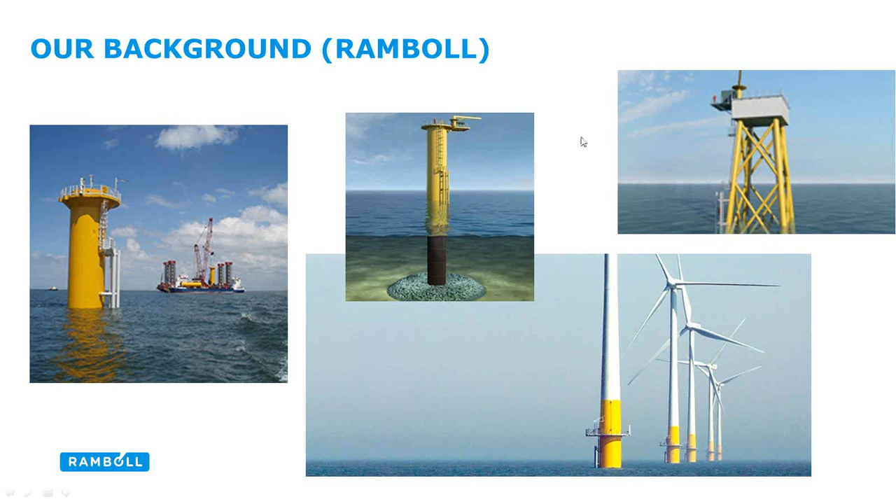Okay, so what we're going to talk about: I'll give you a quick overview of our project, both the design aspect and the actual build aspect, and then how we've arrived at the design we've got - the different concepts we've looked at and developed, and what we've learned from other research and development projects we've been aware of, and then how we arrived at our current design. There's little bits about it too, like the foundations we're considering, how we're going to fix the turbine, how we plan on installing it, different types of connections for example, and then the next steps of the design we're working on at the moment - the frequency analysis - and what the next stages are, and then a brief section about the water pump, the use of the final installed tower and turbine. And throughout, any input would be great.

I realize you're all muted, so maybe just make a note of any useful tips or hints that we could take into our design, so we don't make the same mistakes, and then we'll go through it at the end. I'm sure we'll have a good discussion at the end, so I look forward to that. So, a project overview.

Firstly, why a wooden tower? I'm sure everyone has more experience in this than me, but the reason we've gone for a wooden tower is partly due to potential cost savings. Apparently in previous projects, sourcing the metal tubing which makes up the vast majority of the tower is quite expensive, and you might not be able to actually source it in the location where you are. If there's only one supplier of such metal tubing, it could be very expensive and potentially put pay to your project. If you had a turbine already made and all you wanted was a tower, it avoids the need for welding kit, which could work out really well if you don't have any available at the time.

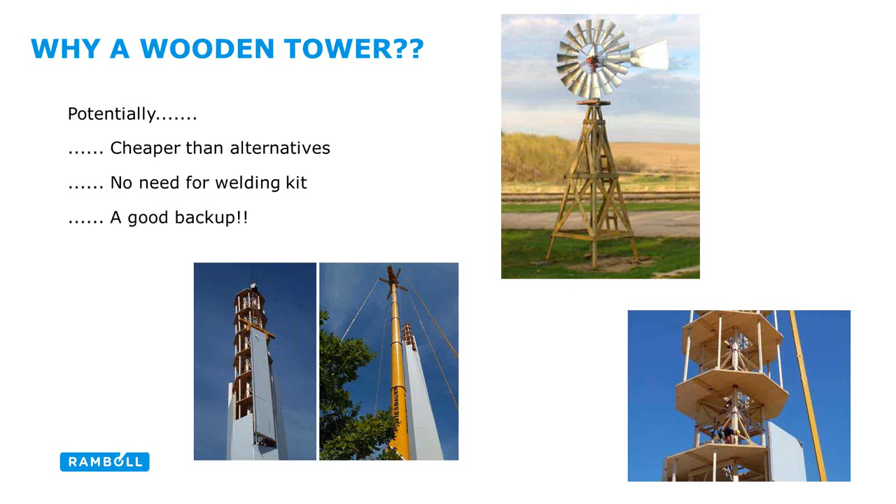So who's been involved in this project so far? Quite a few people. It started with Pete, who's on the call. He set up the charity I Love Wind Power and has been involved in several projects through them. He approached one of the guys from my company and asked whether he would want to be involved in this project. He then wasn't able to, unfortunately, so passed it on to me and Finn in the corner there.

And then we worked on it for a bit. Finn left the company, other people have been involved - so Tom, Kerr and Mark, also from Ramboll. Marco got involved - he has already completed the project in Brazil and has loads of useful insight into that, and is going to come out with us to eventually complete the project, which would be great. Tom from the University of Delft has been really helpful also, and obviously Pete and Jasper from Siemens have provided some really useful insight, and we've had regular meetings with them just to discuss the more technical aspects of our project and steer us in the right direction. So yeah, quite a few people have been involved so far.

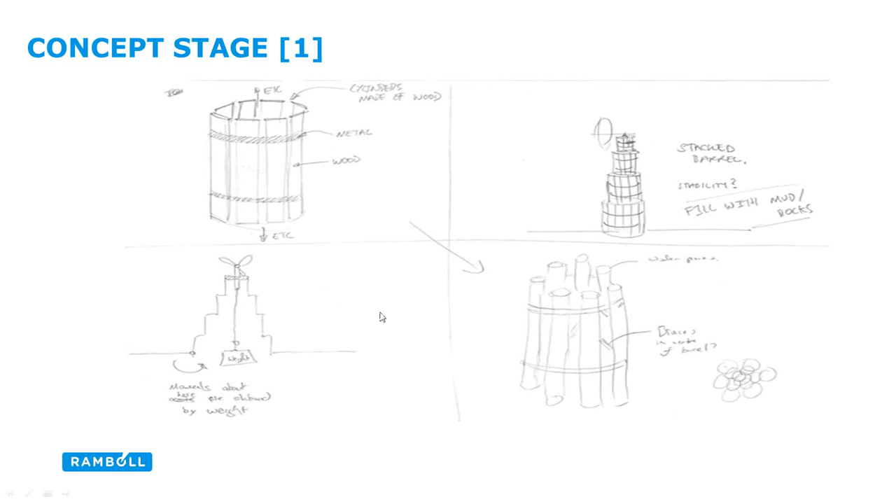So this is the first theme. It's a sort of barrel concept, we called it, where you get your wood and arrange it in barrels, and then you can stack it up, which is fairly neat. We had loads

of suggestions. So this was sort of a tripod concept, which we developed into this, what you see on the left here. Its purpose was ease of installation, so you'd just be able to fold each one of the arms into each other, with the turbine installed on one of them. We based it on offshore foundations, from our background.

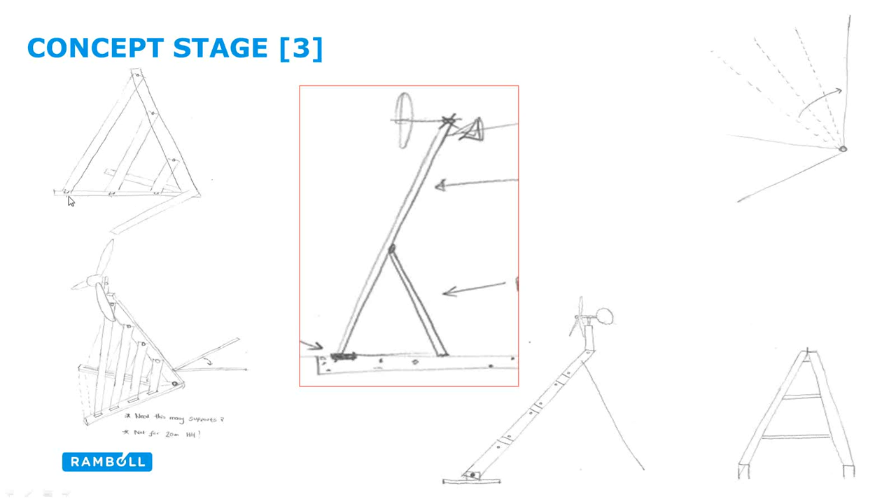We also looked at various other things, so this was another simple installation method. The slats would fold up into separate rungs as you installed it, and it'd be very easy to take the turbine back down. The problem with these last two in particular is that it's quite tricky to scale this up to the hub heights that we wanted, so unfortunately they got binned.

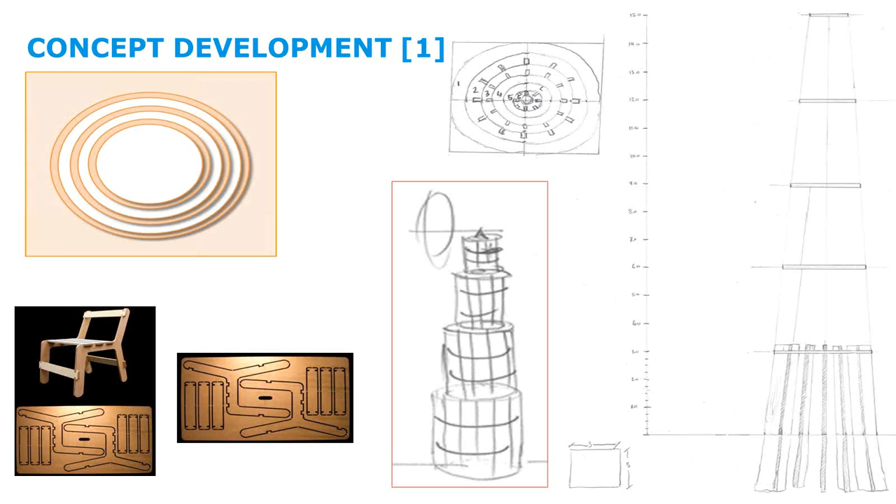And then we started developing the barrel concept. We were quite keen at first to build the turbine out of a single piece of wood, so we looked into furniture design and came up with this concept that you might be able to construct every single layer out of one section. So this circular section in the top left would be extrapolated up and pulled up, and that would form your tower.

We spent a bit of time going down that route, and spoke with Pete and Jasper as they produced their wooden tower concept also, which was installed over in Holland last year. I went over to see it. It's great, really, really impressive. We learned quite a lot from it.

The main points that we took away is the fact that it is possible - you can make a tower out of wood, and it does a very, very good job. It's important to keep the connections as simple as possible. These bolted connections in their design took an awful lot of time to fabricate - lots of holes had to be drilled, and it took a long time to fit all of the bolts. So we tried to take that away and incorporate it into our design.

The planning was also very important. It's all well and good to come up with a great design on paper, but you need to make sure that it's buildable and you know the stages to do that. So we took that into our next design.

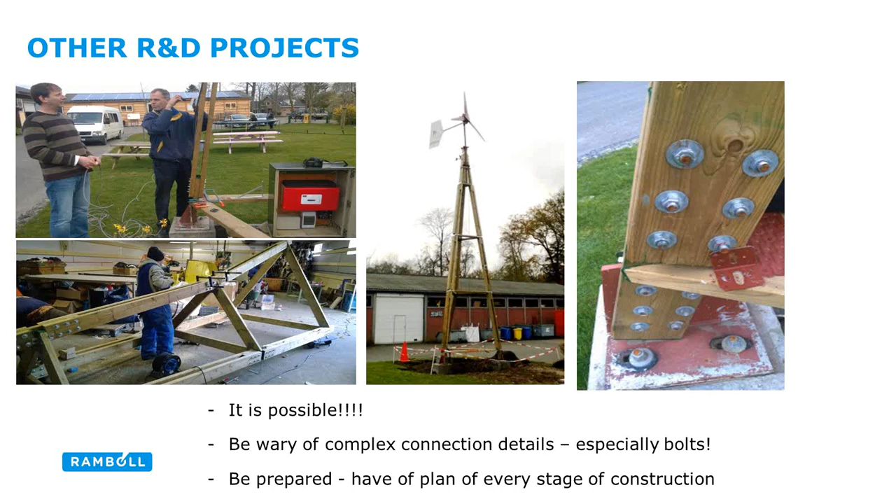We were looking to come up with these slots, which are quite hard to explain really, but you basically take each one of these vertical slats, and it slots in like a jigsaw, and you can construct each one of your layers up from the base. Each of these horizontal sections have been cut out of the same bit of wood, minimizing wastage. Then between each of the levels, you have these vertical slats which slot into each other until you get up to your hub height.

We thought it was a really neat solution, and liked it quite a lot, until we started putting it into ANSYS and looking at where the stress paths were and how the structure would behave, and realised it wasn't such a good idea for our hub height. We want the turbine to be between 12 and 15 metres above the ground, so it had to be constructed over many levels - this guy in the bottom left corner is to scale, so we're talking about a fairly substantial high tower, and to make that freestanding is very challenging, especially with this solution.

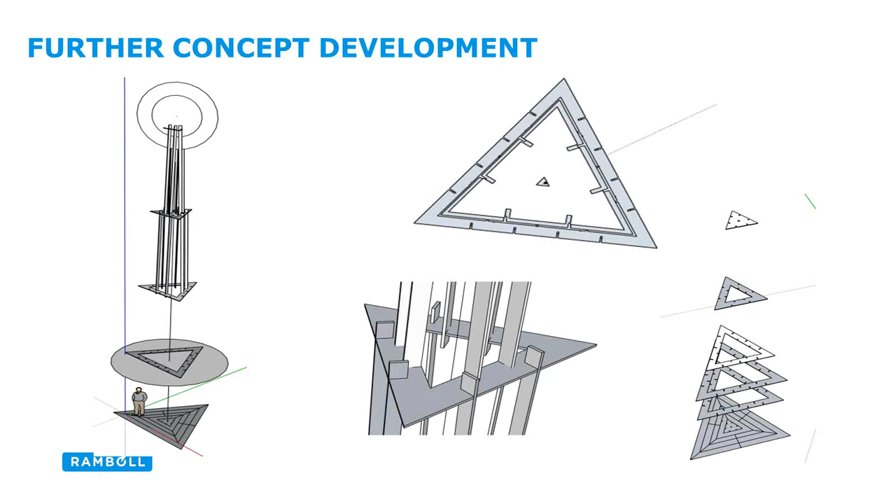So that was lots of the concepts that we explored, and eventually we came up with this solution. It's not that close to many of the other freestanding designs that we had thought about previously. We basically realised that it didn't have to be freestanding necessarily.

The guy wires aren't the item that's particularly hard to source - it was the metal poles. So actually, if we could just take the pole, put it to one side, and replace that with a wooden lattice, then that could do the same job and perform just as well.

So we're looking for a design that would work with a 4-meter rotor diameter and modular construction. With our design, we are going to construct the turbine and the tower in one location at a local school, and then transport it to site. It's important to be able to construct it in one place, then easily disassemble it, move it, and install it at another location, which is useful for most projects.

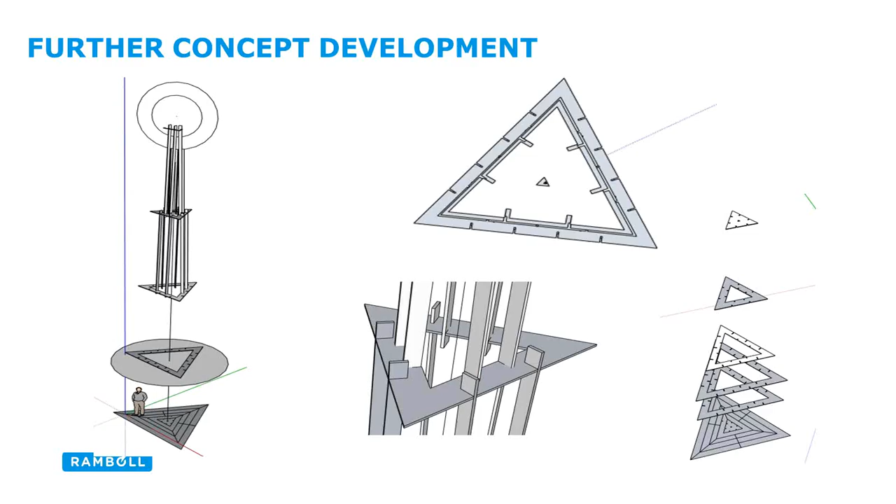Sorry, I should have mentioned that previous slide. Modularity was a big concern as well. We wanted a design that was very adaptable. So although we were looking for a 12-meter tower height, by considering this modular solution, you could have an 8-meter, 12-meter, or 20-meter tower. It's a very adaptable design, so you can change it for your site quite easily.

But for now, sourced at the site, metre-and-a-half sections should be readily available. So a bit more on it.

It's guided, as I said before. We've advised keeping the angle between the guy and the horizontal at least 50 degrees and no more than 70 degrees, so we've gone with 60. The guys extend 7.2 meters out, that's 60% of the hub height or tower height of 12 meters, giving approximately a 10 by 10 area of land which you need.

So it needs quite a lot of space, really. It can be located quite close to buildings, but it's much better if you can spread the legs out a bit more. And then we'll consider installation techniques similar to what have been conducted in the past. Actually, I think that's on the next slide.

It's important to keep the wood raised off the ground to prevent water from ingressing through the timber. So that's why we'd consider a solution with metal angles essentially fixed into the ground, which would be bolted into the foot of the wooden tower, which we could then simply rotate and install.

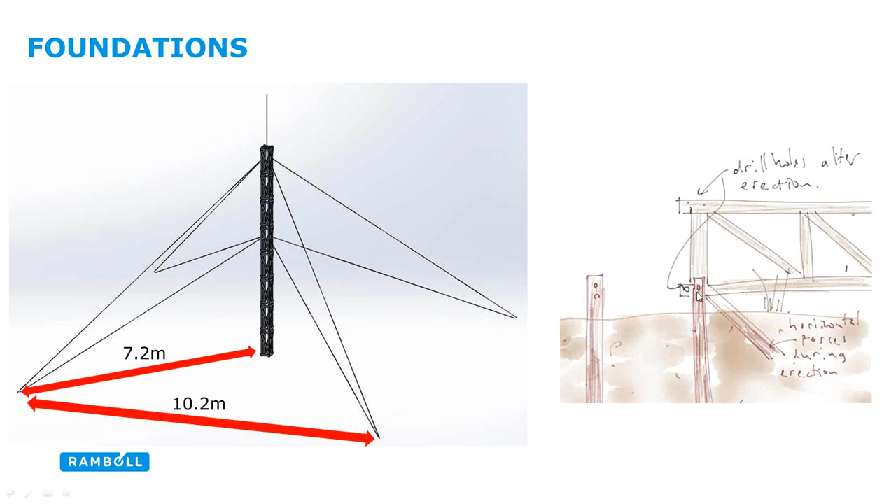And then turbine fixation, we thought about this briefly. A number of suggestions, but we're not really sure which is best to adopt. At the moment, we're considering, on this image on the left-hand side, having a wooden slat through the centre of the top module, and a metal pole extending down through this gap to the bottom of the first module, where there'll be another horizontal slat for it to attach to. Then the turbine would be able to sit on top of this.

The benefit of this is that it limits the amount of clamping required, which could be quite complicated or fairly expensive, depending on if you can get the equipment you need. The other option is just to attach it to one of the 4 sides. We went for 4 sides, by the way, just because it would be much easier to construct than 3.

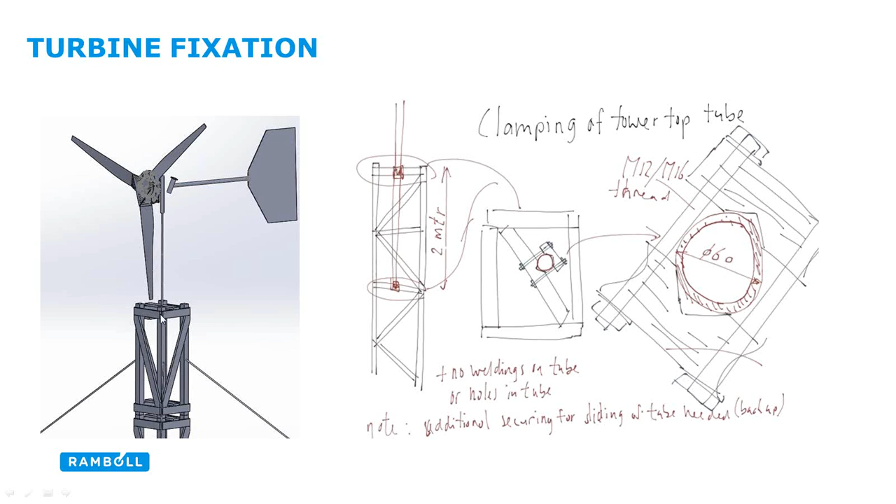So these angles, I wonder if I can show a better picture. These slats could simply be nailed or screwed into the vertical members due to the 90-degree angle between each of the spaces. If you wanted only 3 faces, then this joint becomes much more complicated, and you couldn't just simply connect the 2.

The other beauty of this design is that hopefully you would only need to use 1 or potentially 2 pieces of timber, and that would do for the whole design. All of these sections, the horizontals and the diagonals, would all be made out of the same section, just cut into different shapes and sizes, and potentially a square section for each of the legs.

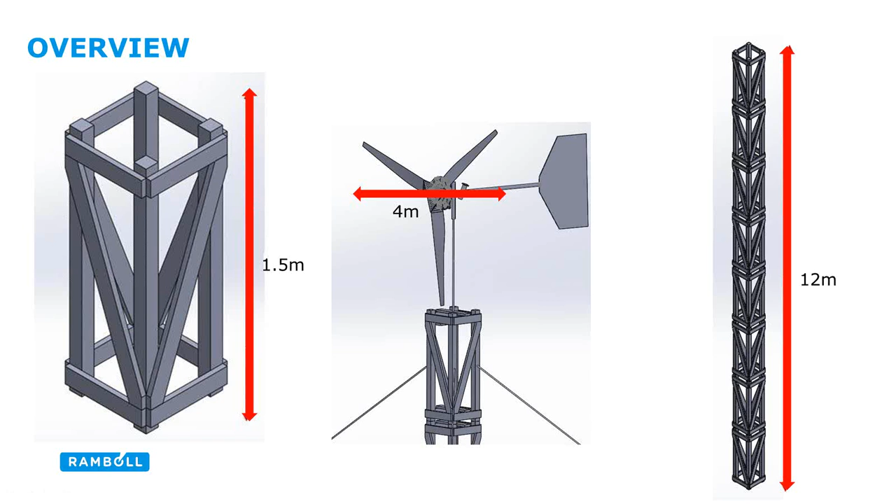You could also come up with - I can't think what the word is - like a sort of template to make the cutting of these angles easier, and then you could just keep reproducing lots and lots, and install it later. So in terms of manufacturing each of the members needed, that should be fairly simple as well. So in terms of buildability, we think this design is quite good.

And then installation, similar to the previous steel towers we were thinking. So we want to try and keep the weight down as much as possible, and then install either through manpower or through the use of a boom, like you can see on the right-hand side there.

We're also looking into alternatives for the guys through Wind Empowerment. I can't remember where Pete got the link from, but there was a very interesting manual on using normal guy wires which avoided using cable clamps. You'd use something similar to chicken wire, I'll have to double check, and you can fabricate your guys out of this material, which would help keep the cost down. We need to check that would work in terms of loading for our design.

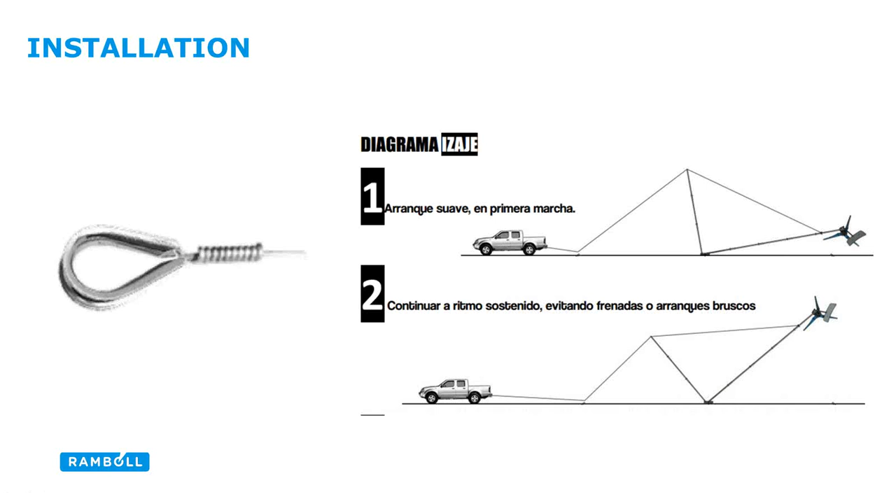Connections, as I said before, we see as being a really important point. A colleague from Ramboll has worked on wooden products before, and unless you're careful with the connections you're specifying, they will easily end up being more expensive than the wooden parts themselves. So it's an area we need to make sure we get right. Also, if our tower doesn't actually behave like a lattice, it won't work like a lattice. If the joints don't work like a lattice, our structure won't really work at all. So it's very important that each of the connections between the different modules, as well as these diagonals, are also connected to the legs in a suitable manner, so that the structure behaves how we'd want it to.

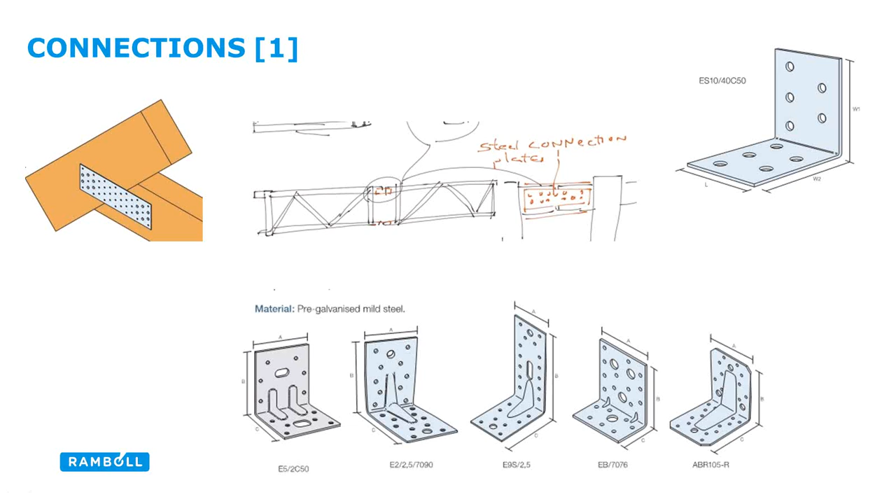So option one is using metal angles - we just find out what we can get over there and use those to make our connections. Option two is making the connections through a section that we'd make ourselves, so we'd add a separate bit of wood and nail, or probably screw or bolt, into the parent leg, and the connection would be made like that.

We're also looking into whether you could only get the one single bit of wood. So if these legs were a rectangular shape rather than square, as this diagram suggests, how you could connect the horizontals and diagonals to that. If they weren't square and were rectangular, as this bottom plot shows, you could potentially have some sort of angle connecting two sections together, and then each of the horizontals and diagonals would be connected into these legs, as this diagram shows - it's not particularly clear, but that's what we're trying to show. So connection design we see as being quite important.

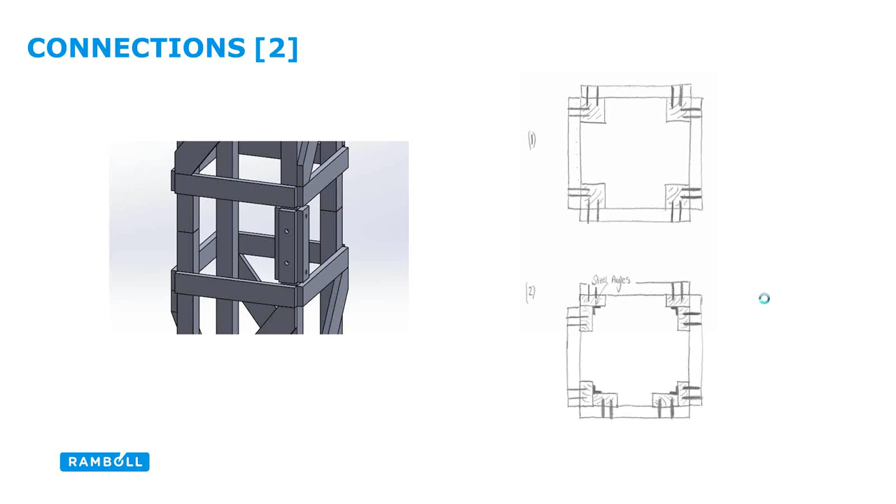And then the next steps. At the moment I'm conducting calcs to work out if the extreme event, so the biggest wind we could expect, is going to be strong enough and robust enough, and what section sizes we would require.

Also of concern is the frequency of the structure. We talked about this a couple of weeks ago with Pete - he brought up that the dynamic loading on the structure from the turbine is also very important. We have no idea how stiff our structure is. We think it's very stiff, but determining how many levels we need, how many diagonals we need, or how big the section sizes are, is much more likely to be driven through the frequency requirements of the structure rather than the ultimate limit state and being able to stand up to an extreme gust or wind speed. So we anticipate we're probably going to be somewhere in this stiff region.

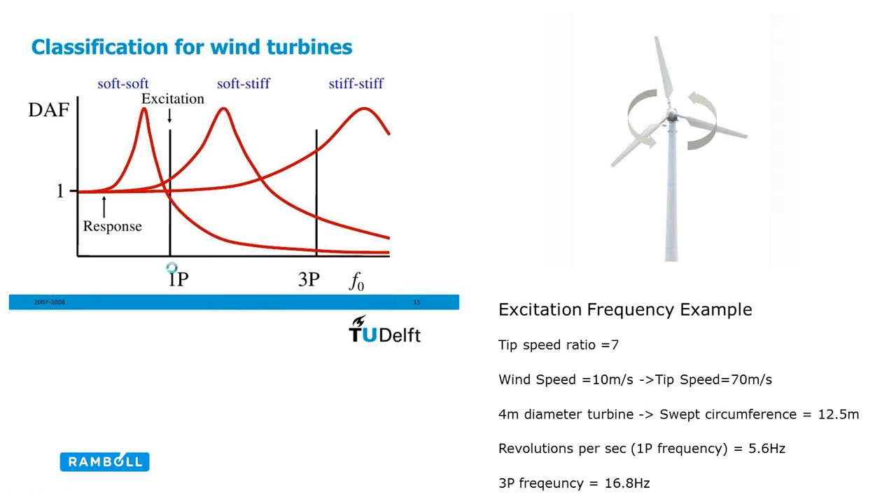So we were looking to conduct a sensitivity analysis in ANSYS. We were using SolidWorks to create the models, and then using ANSYS to run a frequency analysis to determine where we lie. We started off with our current design, which you can see here, which has got one diagonal per module.

So that's a rough module shown on the right-hand side, one module for the first one, then another, and so on. And the larger section sizes we're currently considering are rectangular sections of 200 millimeters in diameter and 40 millimeters thick, which you can see on the right-hand side, with one diagonal.

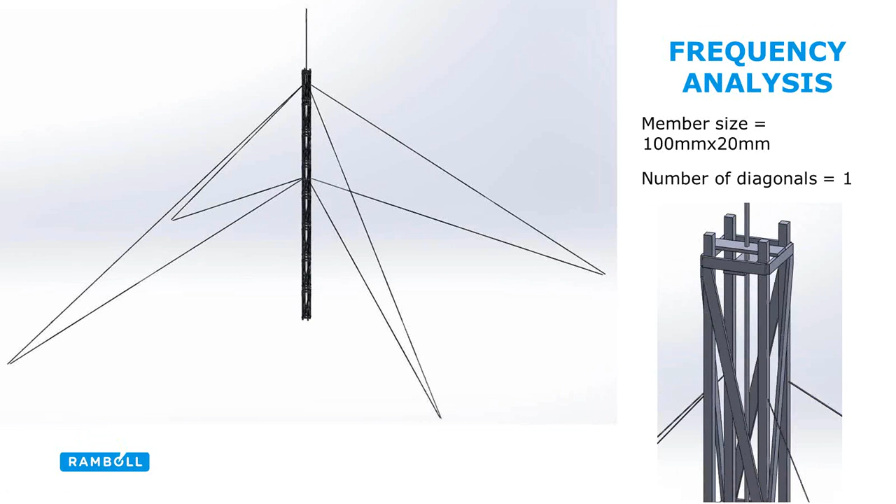So we want to see what the frequency response is of that structure, and then we'd change it to slimmer section sizes, still with one diagonal, and halving each of the section sizes. So we'd now be considering 100 mil and 20 mil, a far more slender tower, and see what the response would be.

And then revert back to our larger member sizes and see what the impact of having additional diagonal bracings would be, as you can see on the right quite clearly. It will obviously make it a lot stiffer, but we want to see if we're closer or further away to these bands, or if they're necessary.

Obviously the smaller sections and minimizing the number of diagonals is beneficial to weight and build time, so we'd be looking to reduce those as much as possible, but we don't know how important it would be. The final iteration would be reverting back to the smaller beam sizes, but also with 3 vertical or horizontal braces.

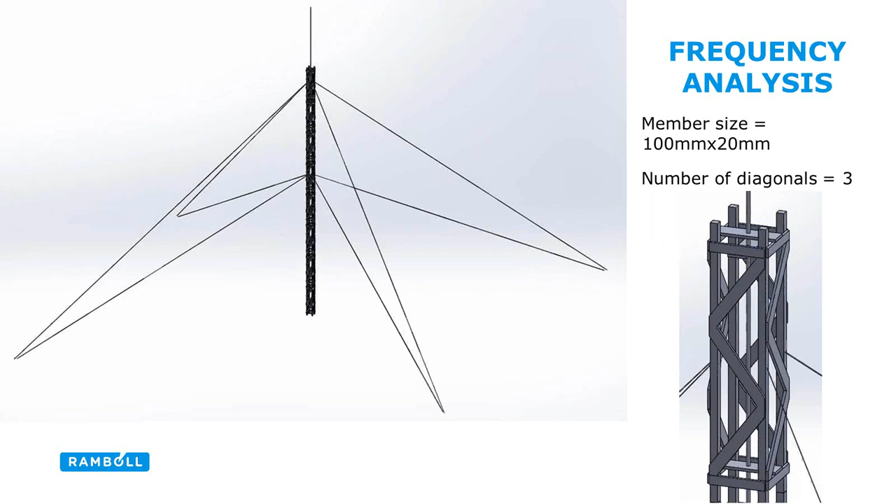Okay, and then a brief section on the water pumps for Brazil. This is one area that I know very, very little about, so colleagues just put a slide together. This is more just to get your responses on, I'm afraid.

So we're going for a DC pump. After the workshop is actually completed, we're going to be disassembling the tower and moving the turbine to a local farm. It's then going to be used to power a water pump for a local irrigation system, and we'll be using a direct current pump, without the need for batteries and other expensive electricals.

Apparently it can be driven directly from the rectifier output, and it's possible to run with a duty cycle, so wind power.

And yeah, this was roughly what we were considering: trying to get up 20 meters in 44 meters, a 5mm diameter pipe. We think that would require a 24-volt DC pump. Wouldn't be massively expensive. The tank would fill up in about 9 hours of operation.

Currently the tank fills up in about an hour, but 9 hours is still feasible. The conclusion is that it's possible, but the flow rate would need to be greatly reduced compared to today. We'll have to check if that's a problem, but I don't think it would be, and we could also always use 2 pumps if the flow rate wasn't sufficient.

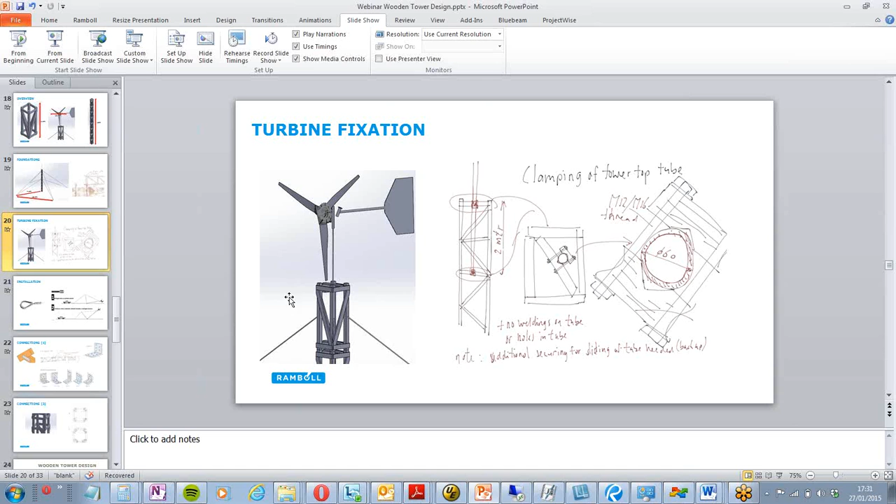Sorry, what do you mean by the spars? The spar, so you have the larger ones, and then you have the thinner lateral supports, the ones that go diagonally. For those, you probably could be able to use shipping pallets.

Yeah, exactly, that would work, especially if you used more of them. That might be slightly too long, but that's quite a good suggestion. You'd just be able to rip it up and fasten them diagonally. Yeah, it's a big nice idea.

A lot of people build furniture out of shipping pallets, chairs, bureaus, workshops, whatever, and the advantage is it's all free.

Yeah, definitely, and I guess you could always use it. You could try and use the sections in between the shipping pallets, the square sections, as the legs also. I don't know how long they would be, but I'm sure you'd be able to.

A lot of times there aren't any larger sections, you just have short pieces, and then you use blocks. A lot of times you don't have a decent piece of wood there because they try to cut down on the cost as well.

And how are the guy wires fixed to the wooden tower? I don't know if I missed that. Oh no, I didn't say - we're not entirely sure. I think there'll probably be a small eye section screwed onto them, so you'd have to buy a separate fastener and attach those to probably the top or the bottom of each of the modules. But that's one area we haven't really looked into too much yet.

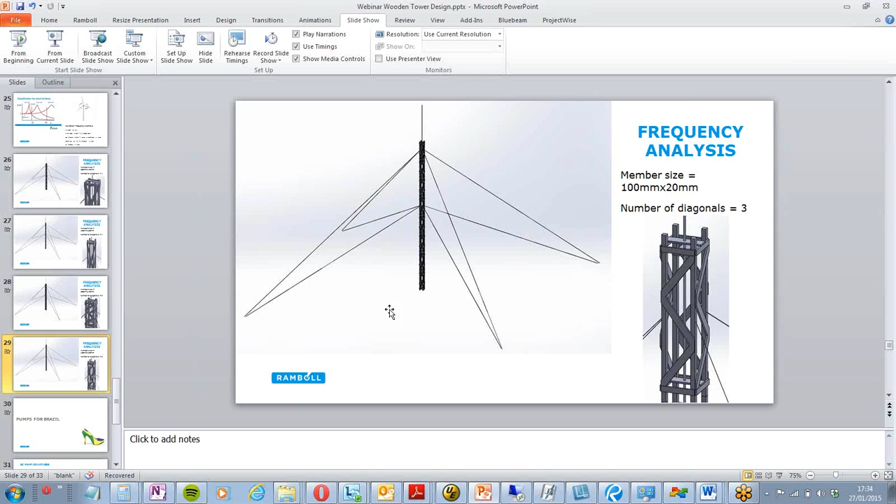Okay, so we're going back to this sort of thing. And where would the pin go? You can't really see it, but where each square section lines up, if you were to drill a hole up and down and put a pin between the two of them, you'd have 2 holes to drill, and all you have to do is slide the pieces together when you get there, rather than having to bolt, screw, or nail.

I think that makes sense, I'm trying to envisage it. So you'd have this square section on the top and the bottom, and then there'd be a pin coming up and a hole in the top one, and they would just slot together. Yeah, exactly. Yeah, I can see that working.

Yeah, I could do it. Can you possibly send a sketch of how you do that? I'm not sure, quite. The easiest way to describe it, and probably not the best way, would be think IKEA furniture.

Okay, yeah, I'd probably sketch. What I'd probably just do, I like the picture that's there, I think that's a pretty good idea. What you just do is use big wood screws, so you put a hole in the outer brace, and then you drill right into the wood 4x4 that's behind it.

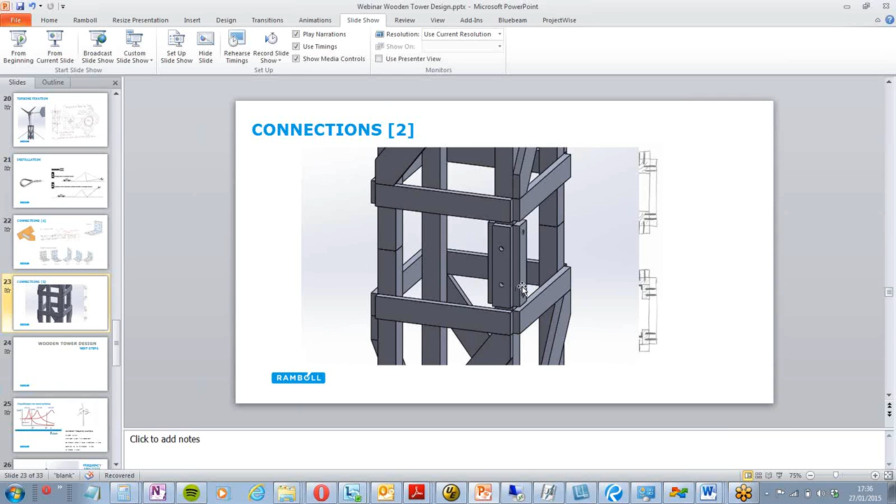I can't quite work out what. I think, Nick, the idea that's just being proposed is a really good idea. I just wonder whether it might be a feasibility problem when we drill holes. We need to be really careful and drill it really straight and vertical, because if you don't have it perfectly done, then when you assemble it as an IKEA kind of thing, your tower won't be a lattice tower anymore.

So I think it's a really good idea, it'll be saving us a lot of time, but we need to be sure that whether we use pins, we do it such that we can drill holes really straight and in the same way in both parts, top and bottom, and the connection.

Another thing, I don't know if you were thinking about doing with the wood pin, like a real IKEA pin. I don't think it will work out with that, but if you do it with metal, I don't know whether it will get rust inside and make the wood rotten quicker. I really don't know, but it's something we need to check out. It looks like a really great idea though.

It's something we'll be able to test out fairly easily as well. We were intending on making one or two of the modules and then connecting them together and testing it. So we could make one connection on two of the legs and a different connection on the other two legs, and see which works out best.

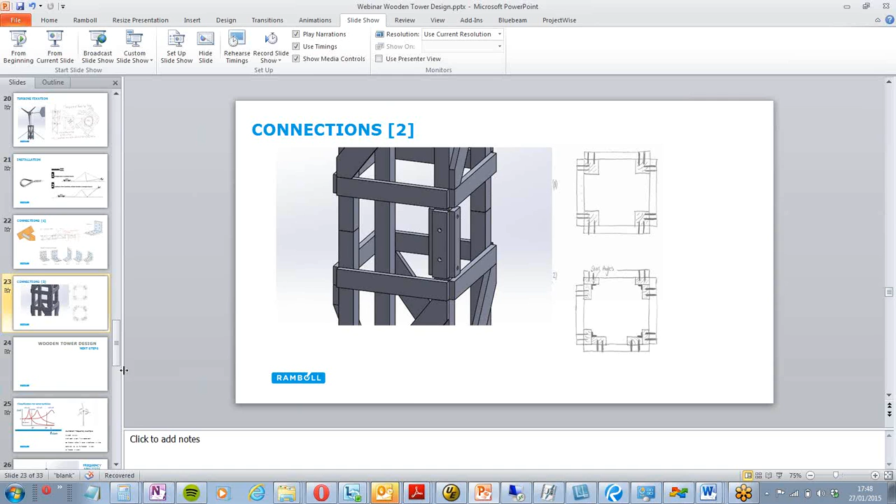It wasn't, from my side, the clearest possible, but basically what you're trying to achieve is pumping water uphill for a 20 meter high drop over a length of 45 meters, so in general we won't use a lot of power to do that. We looked into DC systems, and apparently it's possible. At the moment we're investigating two different DC pumps, and we put these slides together to get some feedback from the broader community, since we don't have much experience with these kinds of systems.

So far that's what we've got. We were hoping for any input and feedback, but otherwise we're going to proceed this way, probably looking at these kinds of pumps, DC or 24 volt systems.

Okay, what I would wonder is, if you have your pump, say a 500 watt pump, what happens when you have less than 500 watts, and what happens when you have more than 500 watts?

Yeah, that's a really... sorry, go on. I think in the pump specification it's written that if it doesn't achieve the threshold energy, it doesn't activate the pump, and automatically dissipates the extra energy it gets. So it should be able to work in a specific range of power that covers our turbine output, considering that even in the best case scenario, which we put at 500 watts, I think it's actually a bit higher, around 800 watts. But I think the requirements of the pump cover that range.